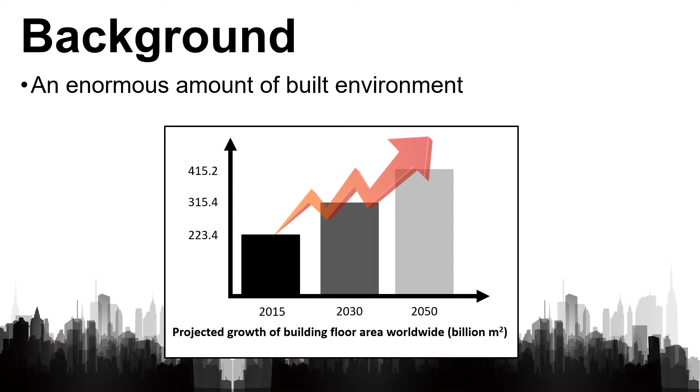The turnover rate of the building stock is low. Therefore, we cannot just rely on new construction solutions. The relative importance of the extraction and construction life cycle stages have increased because of the reduction of the energy loads in the operational phase. And finally, the price of materials extraction is increasing, as is the negative environmental impacts due to natural constraints.

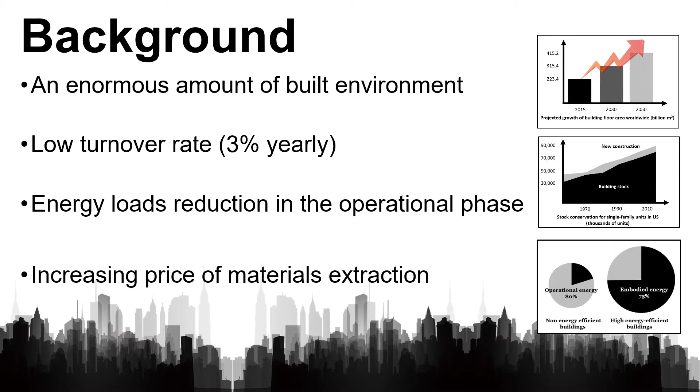To remedy this situation, the construction industry is implementing designs and systems with improved life cycle performance. The main objective is to consider closed-loop cycles. The principle of closed-loop cycle aims to keep products, components, and materials at their highest utility and value as much as possible in order to create sustainable cycles. One example of these trends is product recovery management.

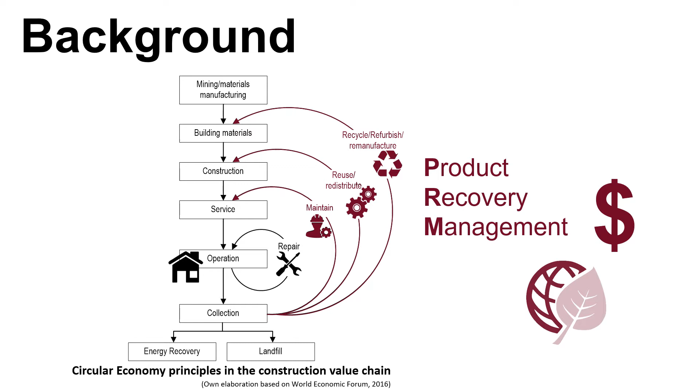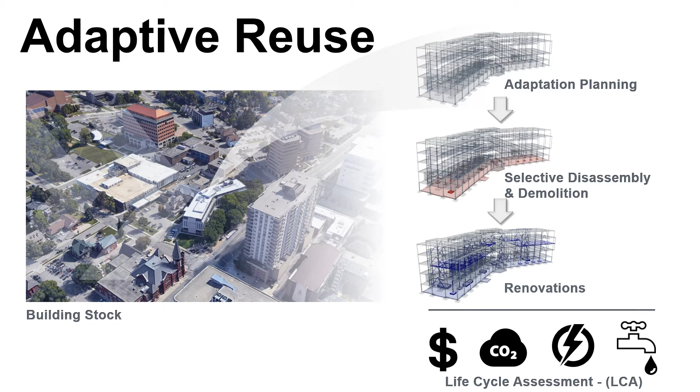In this matter, adaptive reuse of buildings has been identified as a superior alternative in terms of sustainability and circular economy. It involves restoring, and in some cases, changing the use of existing buildings that are obsolete. Adaptive reuse is considered a disruptive practice in the current capital project delivery model for the renewal of today's built environment. In a life cycle perspective, adaptive reuse has the potential to maximize the residual utility and value of existing assets by giving them new life through PRM methods such as selective disassembly and deconstruction planning.

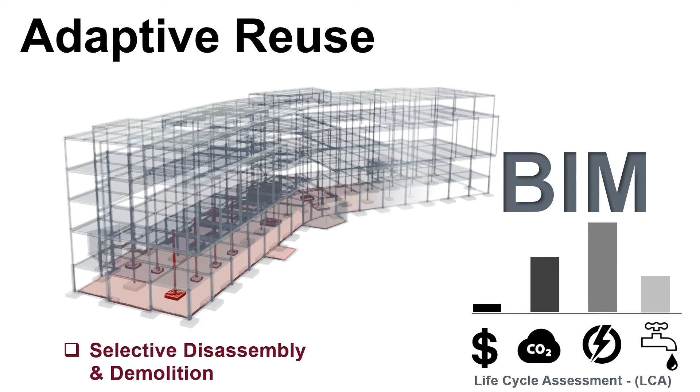The development and implementation of a building information modeling approach for adaptive reuse has the potential for optimizing the project outcomes in terms of life cycle. However, current BIM models do not support important project activities for adaptive reuse, such as disassembly planning, product recovery management, or parametric design to integrate recovered products. Therefore, in this study, we developed an integrated BIM process model for adaptive reuse project execution planning. In this approach, we take advantage of the intelligent 3D model-based processes of BIM for adaptive reuse projects.

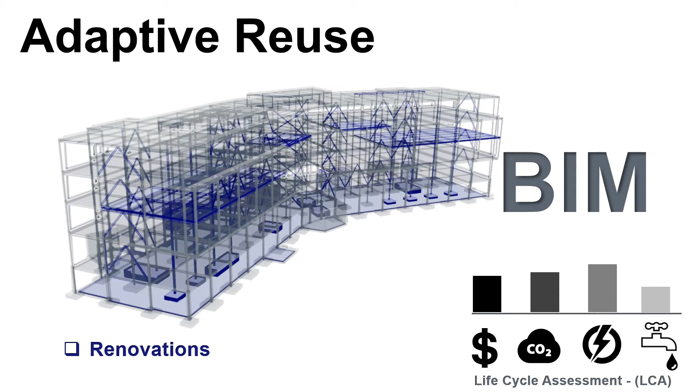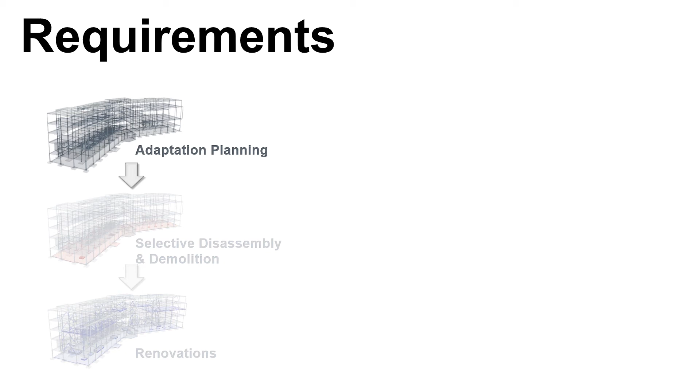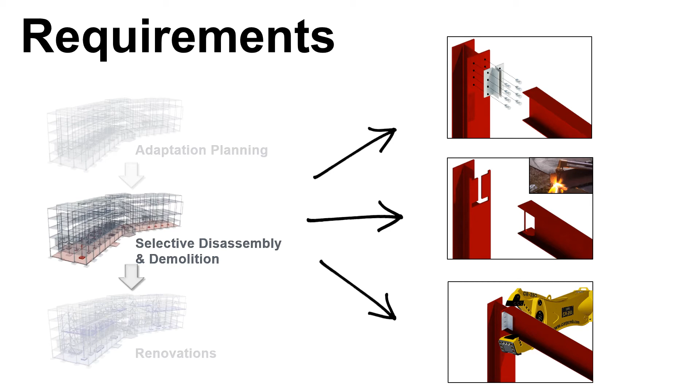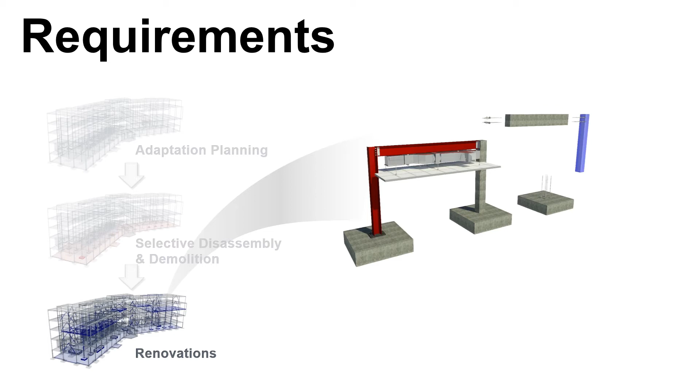Also, based on the experimentation and analysis of previous studies, we identified critical needs and requirements for adaptive reuse BIM models. For example, for the adaptation planning phase, it is necessary to define an appropriate level of detail in order to make the model compatible with disassembly planning theories. For the selective deconstruction stage, it is necessary to set the connection interfaces between building parts for choosing the correct deconstruction methods to apply. For the renovations stage, it is necessary to develop an accurate as-built model in order to fit new or reused parts into the new design. This point is related to the determination of the level of tolerances between the physical interfaces of the existing parts and the new additions.

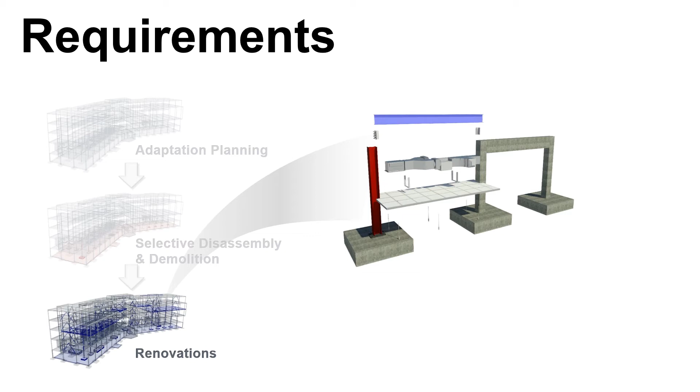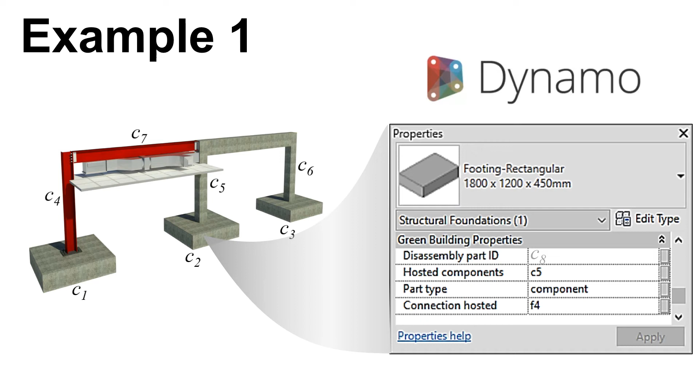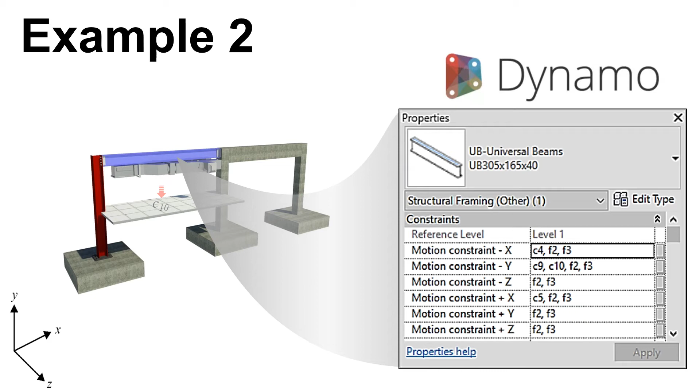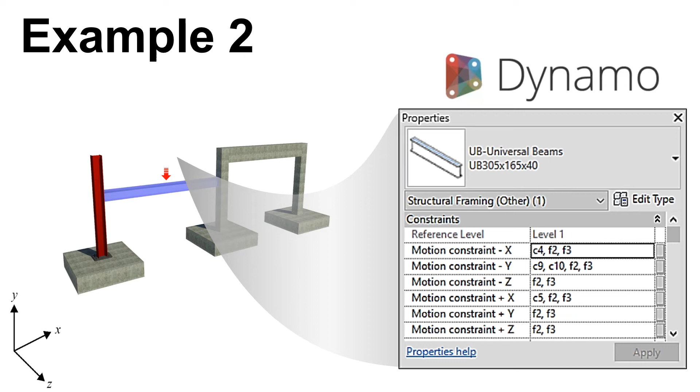For the first example, we developed an automated script to add meaningful information to the BIM elements during the modeling process. This information is fundamental to compute the disassembly planning of target components, such as type of part, disassembly part ID, and hosted components. For the second example, we developed an automated script in order to extract relevant information from the BIM model for the deconstruction planning. This information is necessary for determining the deconstruction sequences of target components to retrieve, such as motion constraints for components and extraction directions for connections.

With the information generated and retrieved from the BIM model, now it is possible to apply methodologies for selective disassembly and deconstruction planning. These methodologies create the optimal activity network and disassembly sequences to retrieve components based on physical, economical, and environmental constraints. These are just two examples of several needs that we have pointed out in the full paper. There are more stages in the process of adaptive reuse that must be covered in future research, such as managing and undertaking the activities for the construction and renovation works.

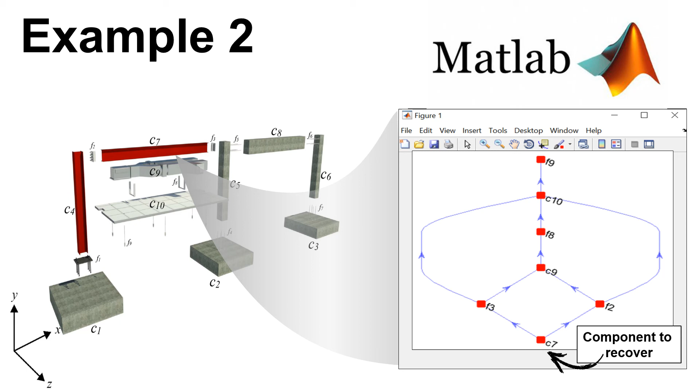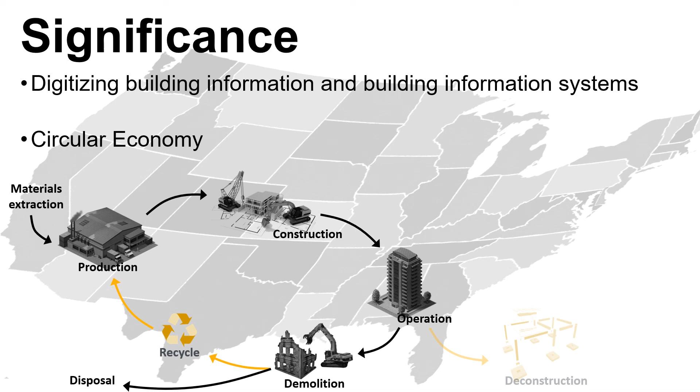We are living in an era of technological advancements that are making possible the improvement of buildings' performance along all the life cycle and along the entire construction supply chain. For example, it has been demonstrated that digitizing building information is reshaping the ways for delivering buildings. Digitizing the built environment is leading to a greater integration across practices and scales that were once considered separately. This integration is helping to create technical solutions and new functional business models in the field of circular economy, with the purpose to move towards a more sustainable environment.

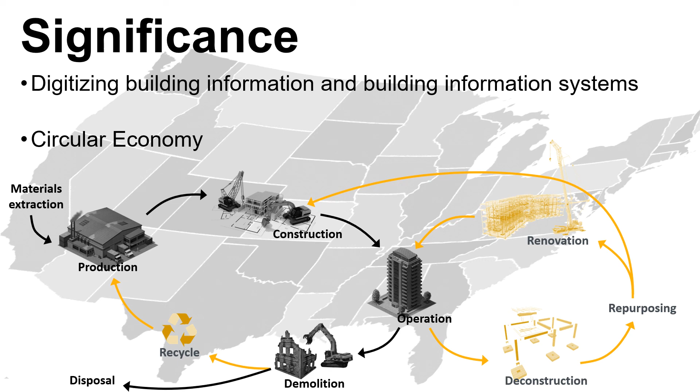The framework developed in this study helps to understand how to effectively tackle some technical and execution barriers by complementing the information included in the current BIM structure. In this study, we demonstrate with functional examples the possibility of complementing this missing information in BIM models for adaptive reuse. Thank you.